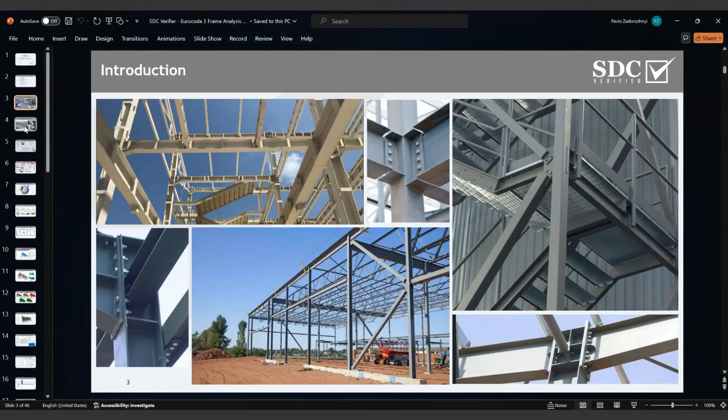To avoid such failures as global buckling, as you can see from this example, and to avoid some problems with the joints, because when you have some problems with the joint, in the end it can collapse the full structure. So in some cases, it can be a very real challenge when you have hundreds or even thousands of members and joints on your structure, and all of this should be checked. Also, you have like hundreds of combinations which you need to take into account and analyze the influence of each on your model. So all this can take a lot of time.

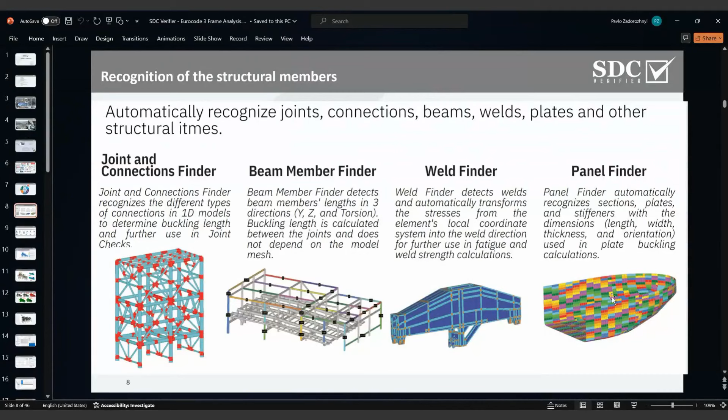As I mentioned before, we had the standalone version. Basically, that's how this standalone version of SDC looks. In that case, you can prepare your FEA model, analyze it using Simcenter Nastran solver, and then use all the possibilities of SDC to check this model without any additional program. So you will have only one file which already includes the model and SDC project, and you can work with it and prepare all your documentation. So that's basically how the Windows SDC looks.

Here you can see some FEA model. From the left side you can see the model tree explanation - all FEM loads applied to the model, all constraints, explanation of your job, individual load sets, and all required information about your model.

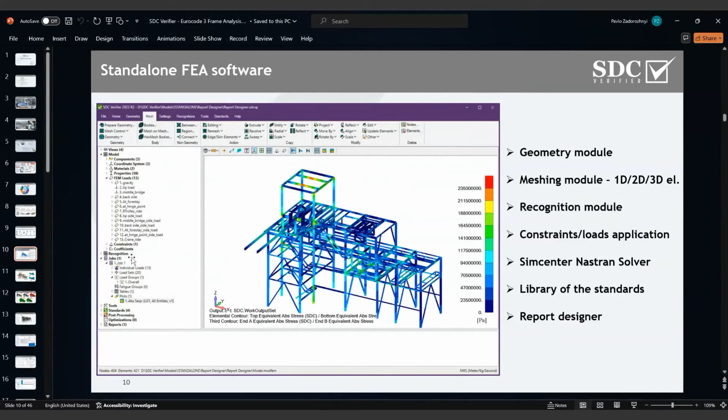Now let's go to model explanation. For this example, I will use a simple model of a steel frame. This is part of some industrial building. The model in general is created with 1D elements, as you can see - simple rolled shapes, in general I-shapes or C-shapes.

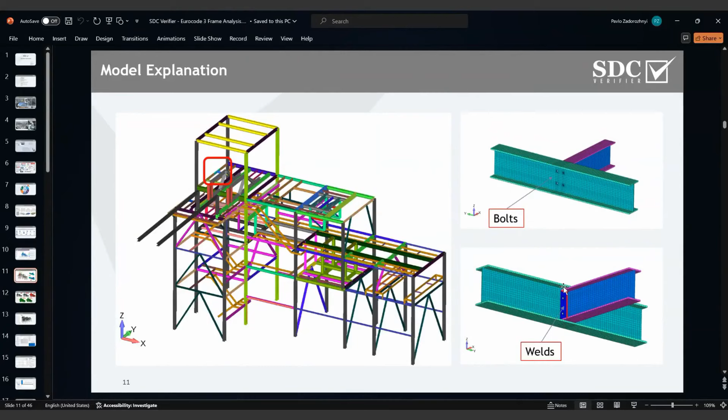Also, at this part, I created some detailed model with plate elements, 2D shell elements, which are connected with 1D element bolts. I will use this detailed model for bolt check - we will check it according to Eurocode rules. Also, to make this connection, you have a rolled I-beam which should be connected with bolts, so you need to weld some plate on top of this I-beam. I will use this to show you how to do a weld strength check according to Eurocode rules.

The model already has all loads applied. Here you can see a few of them. We take into account the dead weight of the structure, and we also apply some loads from the dead weight of equipment - this is some local influence. Also, we take into account platform dead loads, which is like distributed forces. And we would also like to take into account wind load in two directions - wind load in the X direction and in the Y direction.

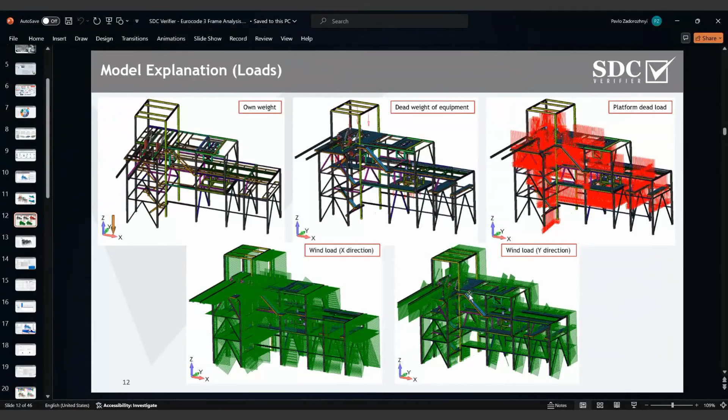Also we use a simple type of constraint - I just simply fixed it from the bottom. It basically simulates the connection with anchor bolts, nothing special, just a simple fixed constraint. So at this step, basically, we are done with the model - we had the model, we applied forces to this model, and we had some boundary conditions.

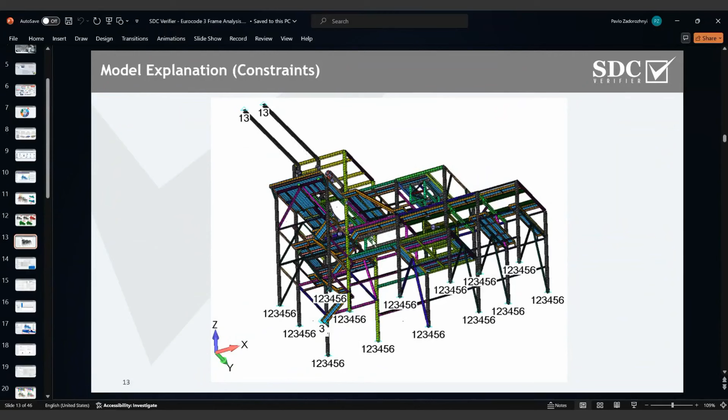Next, what we need to do, and it is very important, is to prepare some load combinations according to standards. SDC Verifier basically gives you two options for how we can create this load combination. The first one is shown here - it's based on some hand calculation, so you can prepare a table with load combinations directly within SDC.

You just select under the model tree, load sets, select create, edit multiple, and you will see a table with the list of your individual loads. We see that I had 11 individual loads in my model, and I combined them in total into 16 load sets. Here you can read in a row the title of our load combination, and all the individual loads which I include into my load combination, with the factors which will be multiplied to this individual load.

Basically, a load combination is a linear combination of our individual loads. An individual load is a combination of FEM load plus boundary condition. So this linear combination will show us the total influence of all these loads on our structure with the proper load combination. You can easily work with this table - you can create this matrix with factors directly here in SDC, or you can prepare your matrix with factors in Excel, where you can link all your cells with some equation.

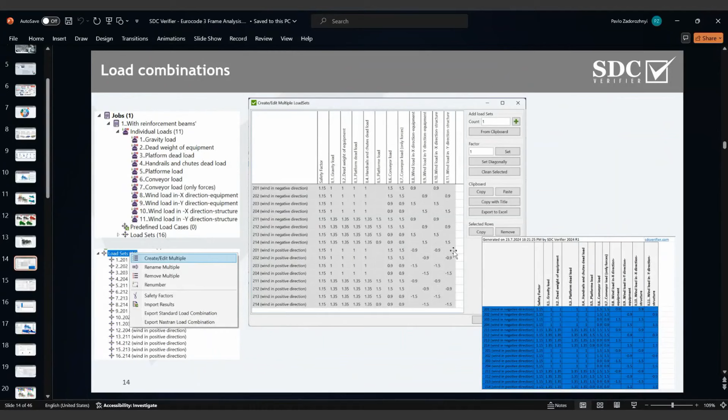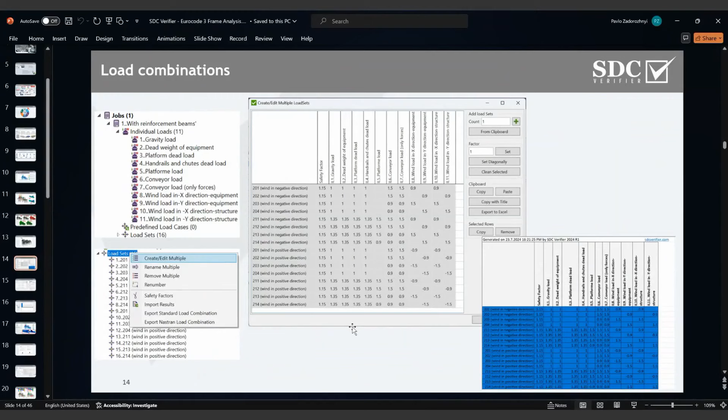If you need to change some dynamic factor or partial safety factor, you can automatically update it in Excel, then select all these factors, copy and paste to this table, press OK, and it will automatically create new load sets. If you already created them, it will update the existing ones with the proper load factors. So this is the first way to work with load combinations.

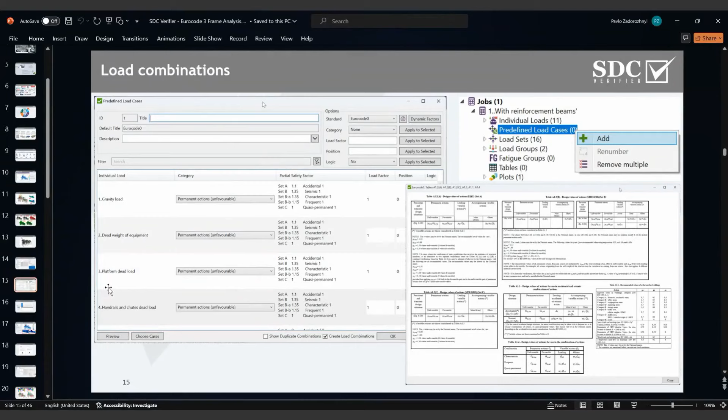You can already see the partial safety factor, and if needed, you can also add dynamic factors to each of these individual loads and press OK. After that, all load combinations will be automatically created according to these tables, with the proper partial safety factor and taking into account any additional dynamic factors you typed here. So these are the two ways to create load combinations in SDC.

After that, the next step we recommend is to combine all the load sets into a load group. A load group will show you the worst results, the highest results, from all the loads or load combinations included in this group. This helps you see, in one plot, all the worst results and find all critical zones on your model. We use load groups to show all our check results, because this helps us not to miss any critical zones.

So a load group is like an envelope combination, showing you all the worst results from all items included in it. In our case, we will use load group envelope load sets. This is automatically created, and as you can see, it already includes all our load combinations created in the previous step.

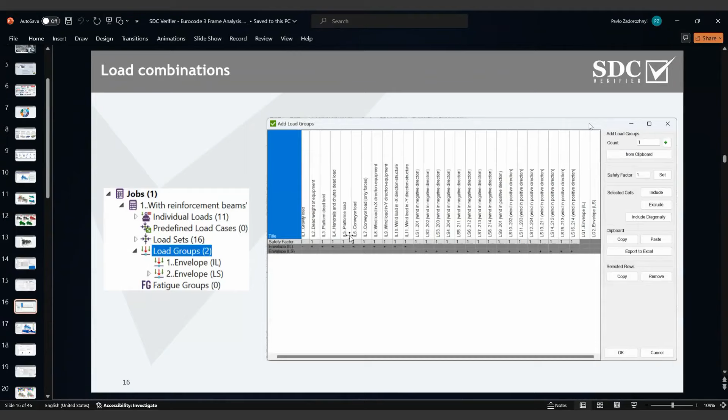So we're done with all this preparation, and let's check some stress results. The model was already analyzed, I prepared the load combination, and I try to check my stress results on the load group. As you can see, the stress level is not so high.

Assuming we use steel as S235, all stresses are below the yield limit, but this plot and results of stresses do not give us an answer if our structure is safe, because buckling can occur in some members even when stress is less than the yield limit. To get an answer on whether our structure is safe enough, we should do some checks according to standard rules.

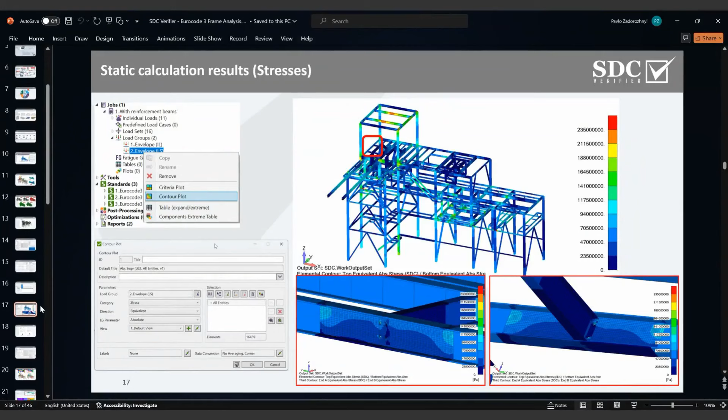For this, we will refer to two standards during this webinar: two Eurocode standards. The first is Eurocode 3 Part 1.1, which helps us check our structure in general. It helps us check all cross sections, and most importantly, check all our members for buckling. The second one is Eurocode 3 Part 1.8, which covers the design of joints.

This will help us check our joints in more detail. We will check the bolted connection which I modeled in detail, and also check the welds at this connection. So we will perform a weld strength check. And we will start from the global check.

This is Eurocode 3 Part 1.1, the beam member check. To do this, first of all, we need to recognize all members in our model. To do this quickly, we can go to recognition tools and select from the list the beam member finder. After that, you will see the main window of the beam member finder, with some settings, but in most cases you don't need to change anything since you can use the default settings.

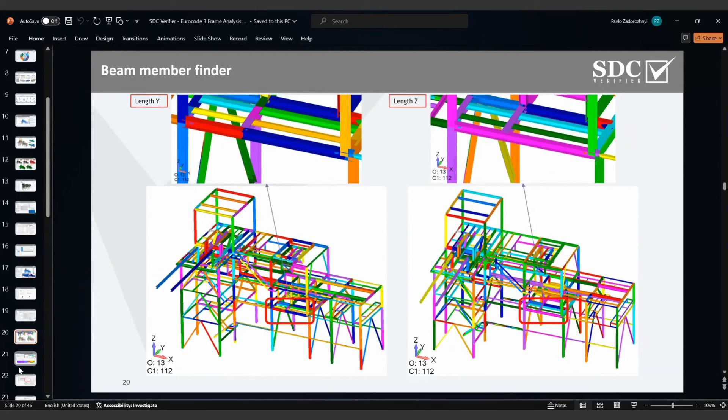Also, each of these members can be added manually. So you see we have a tab with edit member, and you can hide or select from a full list some member which you are interested in, or you can, by pressing this button, select one element on a member, and it will automatically show you this member.

And from this picture, you can see the full length of this member and on which nodes it is divided. For each submember, you can see the length which was recognized by SDC. This is shown for different planes, so LY, LZ, and also for torsion. All these lengths you can edit manually.

For example, if you want to remove some node, to check what will happen if the buckling length is taken into account from this node to this node, you simply unselect this node. So this is node 1345. You go to this node and select it in that direction, and in that case the full length from this node to this node will be taken into account in the check.

So yeah, all this is editable, and you can easily edit all these parameters of each member which was already recognized in your model.

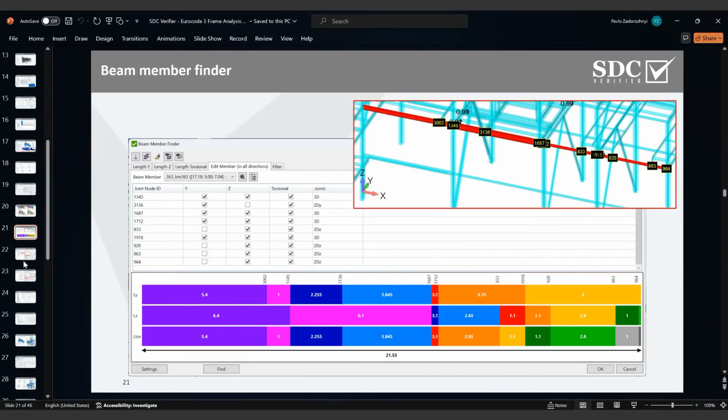We have finally recognized all our members, and the next step is to add standards to our project and to define some parameters of the standard. So to do this, you go to standards in the model tree.

Select, press the right mouse button, click on it, and select from the list the required standard. In our case, we start from the member check, so we should select Eurocode 3 members.

After that, you will see a window with standard settings. We call this the standard wizard window. Here you can see some parameters which you should define, and some parameters which are already defined as default. For example, all these factors, this is a default value.

It refers to the standard, so you can easily find it in the standard. Also, for each of these windows, when you open it or press F1, you will be directly redirected to our help page of SDC, where you can find explanations for all these parameters, with reference to the standard, why you need to define it and where we are taking this value from.

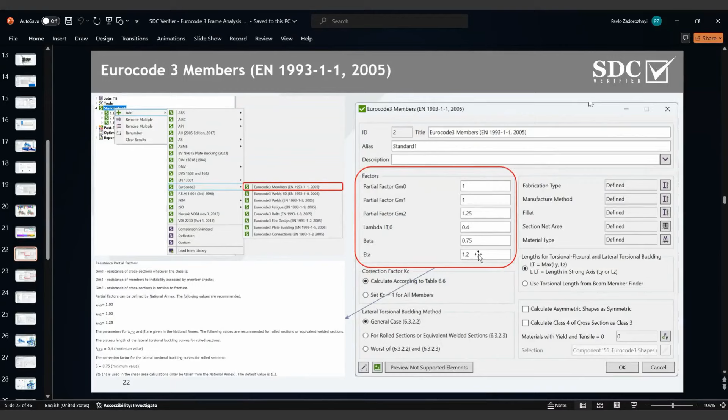So this parameter is default, but as you can see, you can still edit it. You can type here your own values, or you can leave it by default.

The next one, you should define some parameters of your member. So this is like some fabrication type, and it will have influence on the results. Fabrication type means you should select whether it's a rolled beam member or welded, so some manufacturing method, or hot finished, or cold formed.

In some cases, when you simplify your model and prepare your cross section without taking into account fillets on your model, you can edit it here, by typing in a value for your fillets, and it will be taken into account when the cross section is being checked.

Also, same for section net area, because when you model everything with 1D elements, in some cases it's hard to take into account some holes for the bolts. This will reduce cross section area, and you can take this into account here by defining the proper value. The last parameter is material type, which is required because buckling curves used in the calculation depend on it.

Also, this is a correction factor, which depends on moment distribution. It refers to table 6.6. You have two options: you can calculate it according to this table, or go the easiest way and just set it to one for all members, which would be like a worst case scenario.

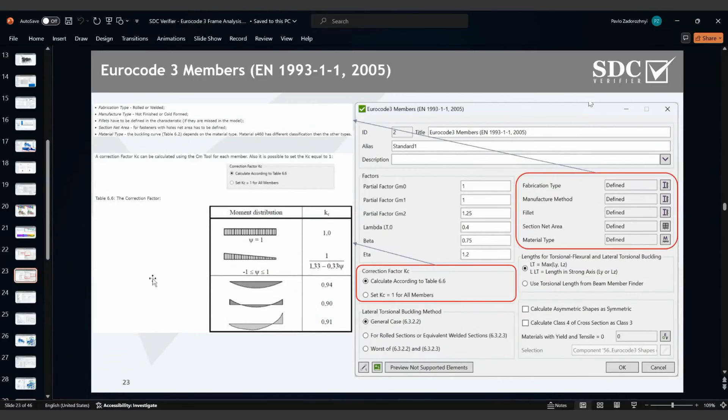After we define all these parameters, you can press OK. Also, one more thing: if you forget to recognize members using Beam Member Finder, you can go to Beam Member Finder directly from this window of the standard wizard by pressing this button. It will open the window with Beam Member Finder, and you can recognize all members, then go back to this window and set up all parameters. When you press OK, under your standards you will see that you have added one standard, the Eurocode 3 member.

When you open the standard, you will see a list of checks. This is a list of checks which you can basically find in the standard, and each of these checks you can easily edit.

For example, if you select this check, press right mouse click on it, select edit, you will see this window with the check where you can find all formulas or equations used in this check, with reference to the equations in the standard. So everything is clear, we do not hide anything. We also give you an option to edit these checks, so you can convert the standard into a custom one and easily edit it, add your own formulas or update some formulas already included in the standard, and then use it for your calculation.

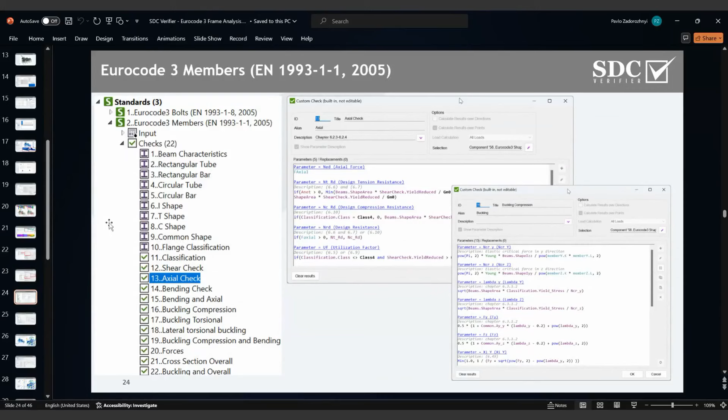When we add the standards, the next step is to run our check. To do this, you need to simply select it. I always start by plotting my results, and for this I select the last check in this Eurocode member check, because we have a lot of checks included in this standard: shear check, axial check, bending check, buckling compression, buckling torsion, and so on. This last check is buckling overall, and it will show us the highest values of utilization factor from all the checks above.

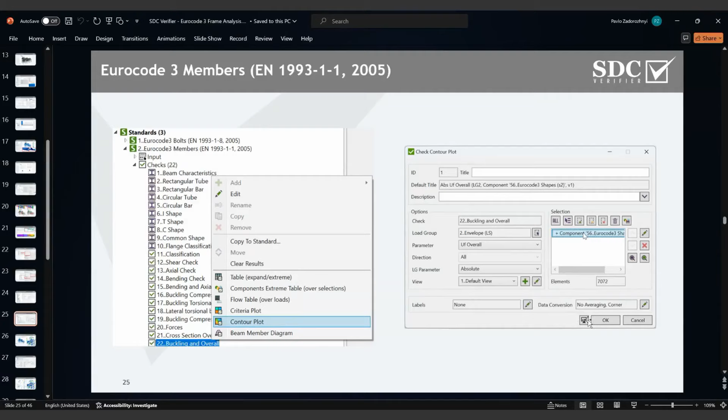So I would like to look at the contour plot. After selecting contour plot, you will see a window where you can set parameters for your plot. I use the parameter utilization factor overall, and I'd like to look at results for a load group with all load sets included. After pressing the preview button, SDC will start to analyze the check, and after that you will see how the results of the beam member check look. As you remember, the stress level was really less than yield.

But when you look at this beam member check, you can see that we had some overstressed members. Not overstressed, but some members with utilization factor higher than one. All our checks present results with the value of utilization factor. So all values higher than one mean that it doesn't pass the check according to standard rules.

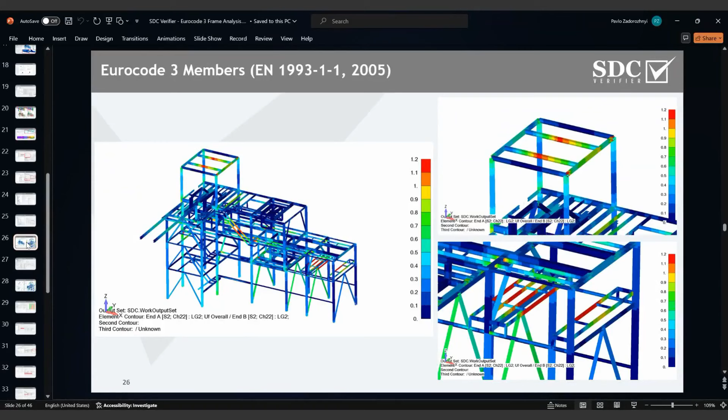And when I see this, my next step is, I would like to post-process these results. I would like to know what the real value is here, how much bigger than one, and also what load has the biggest influence on this result. To do this, we can use our SDC post-processing tool. This is Peak Finder.

It will help us not miss any overstressed parts of your model, and also help us find out what load combination mainly causes this problem, and check all critical zones. So I add this peak finder and set some parameters. I will check based on overall utilization factor. I would like to see all zones with values of utilization factor higher than one.

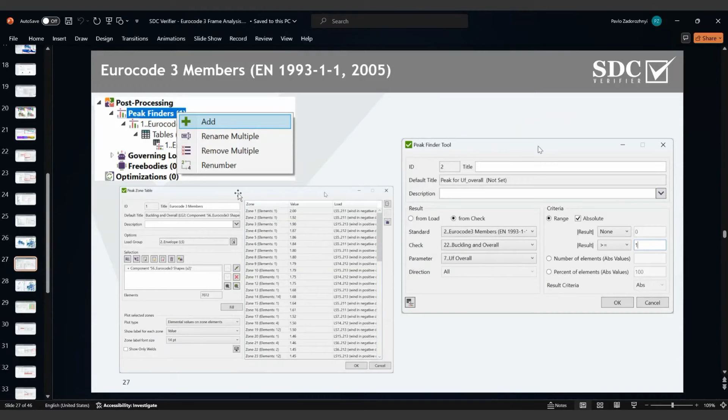And after I press OK, I will see this table. This table basically shows me all zones in our model with utilization factor higher than one, and the load which has the biggest influence on these zones. And also, I can make a plot for this. I can visualize this. If you go to the next slide, you will see.

That's how these results look in a general plot of member check, and then I plot it from peak finder, and you see that at this middle part we had utilization factor 1.16. So this part is also overstressed, and here it is 1.68. With this peak finder tool, you can easily find all overstressed zones in your model, even if you have a really big model with hidden parts which you cannot see in the full view. The peak finder will highlight all problem zones.

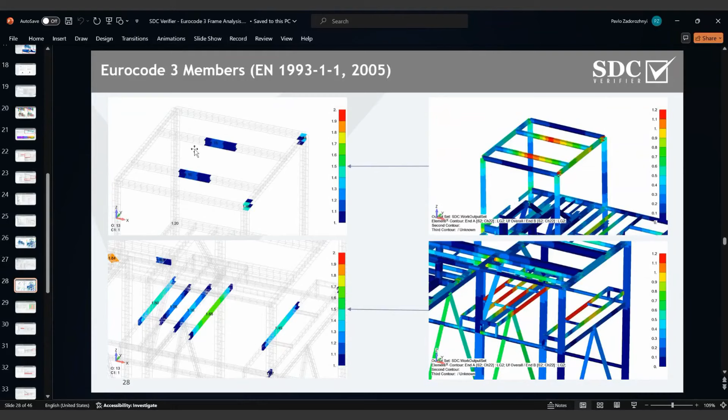Another way to check results is the table. You can check all your results in the table. For this, you need to select the same check, but instead of selecting contour plot or criteria plot, you should select table. After that, you will see this window. You just need to press fill table, and it will fill this table with all results for each member. Here you can see the ID of the beam member, and here the values of all utilization factors. The overall utilization factor is the maximum of all of these, 1.52.

And also you can check in detail how this is calculated. When you, for example, select the first member from this list, this button will activate. This is detailed results. When you press it, you will see this window, which shows a step-by-step calculation with all values and how they were calculated. So it really helps you understand why you have these results, because of what numbers and characteristics. It helps to figure out your problem.

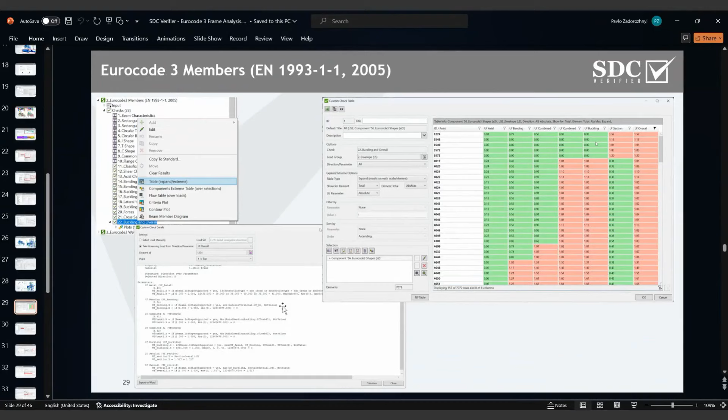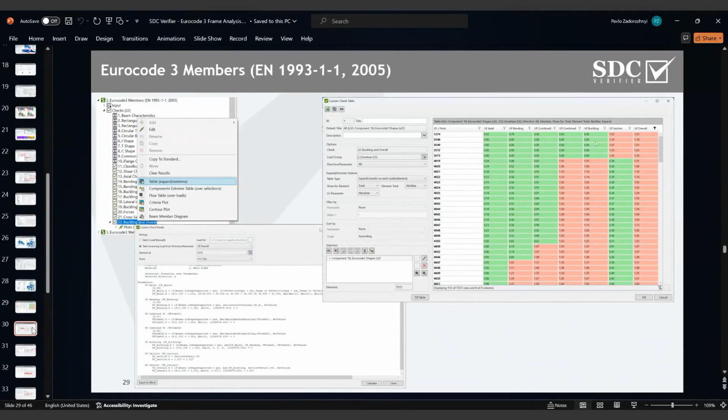So we are done with Eurocode member check, and the next one is Eurocode bolt check. We don't need to recognize any bolts here. We just need to select the proper elements which we need to check as bolts. So we can immediately start with adding our standard. We select the proper standard from a list, in our case Eurocode 3 bolt. After that, we will see the window with some standard settings which you need to define.

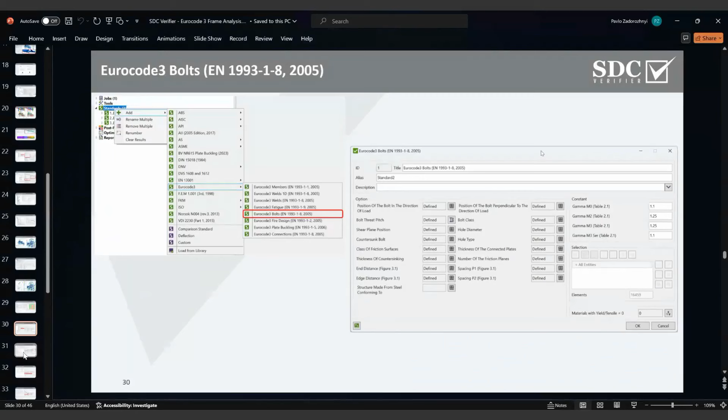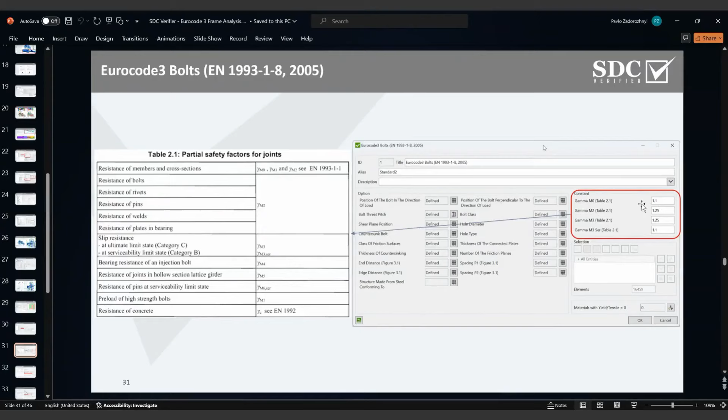You see there are more parameters than there were for beam member check, because we cannot automatically recognize all these parameters for a bolted connection, so you need to define them manually. First of all, this is a constant. This value is according to table 2.1. It is a default value; you don't need to change it because it directly refers to the standard. Next, you need to define end distances, edge distances and spacings for your bolted connection. It will influence your results, and it refers to these figures from the standard.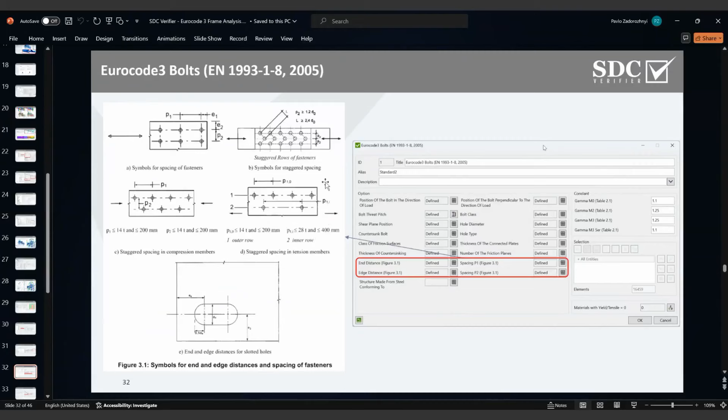Also, you need to define some hole type, to determine values of factor Ks, and also class of friction. All other parameters are parameters which refer to some bolt dimension. But for example, for the position of the bolt in the direction of load, you should define which bolts are end bolts or inner bolts. The same for position of the bolts perpendicular. So we need to define which bolts are end bolts and which bolts are inner bolts.

So, bolt class. This is a parameter of the bolt which will be used in a preload calculation. Some hole diameter. Also, you need to define the bolt thread pitch, which we cannot measure from the simple 1D element, countersink bolt, if it is countersunk or not, thickness of countersink, and so on. So these are simple parameters and dimensions of bolts.

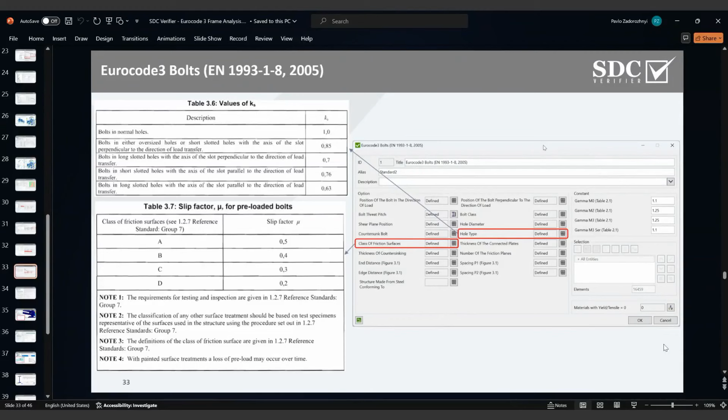When you define all these parameters, you can press OK, and you will see that one more standard is added to your standard list. So it is Eurocode 3 Bolts. And when you go to checks, here you can see a slightly smaller number of checks. All these checks are grouped according to this table 3.2. These are categories of different bolted connections, depending on loading and the checks which you need to do. So this is bearing type, slip resistance, non-preloaded, preloaded bolts, and so on.

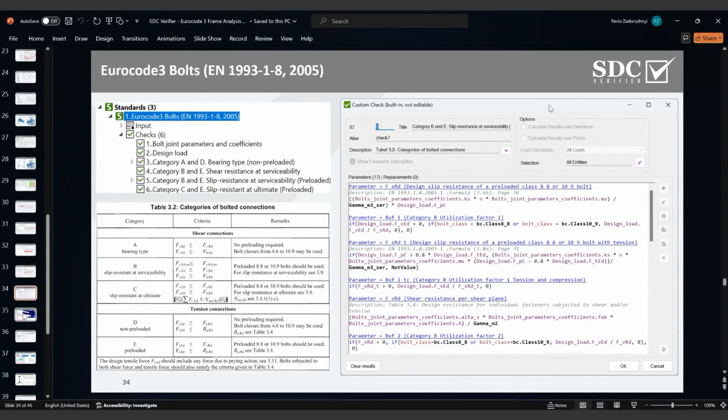And also each of these checks you can edit. Select one of them, press edit, and you will see the window with all formulas, with all equations, with reference to the standard. You can easily find it in the standard, so you can convert this to a custom check and update manually. So edit our formulas, edit your own formulas, and use them in your calculation. And when we are done with this, we can plot our results.

So first of all, I start with plots. I would like to check my bolts on slip resistance at serviceability for preloaded bolts. So I select this check. I select criteria plot. I select my load group. Select these 4 bolts and just press preview. And after that, SDC starts to analyze this standard, and that's how the results look.

Yeah, the results look not so high. You see that all stresses are less than... not stresses, all utilization factors are less than 0.2. But as you remember, even the stress level at these zones was really low. So these results are reasonable. So we do not have any problem with this bolt and with this bolted connection in general.

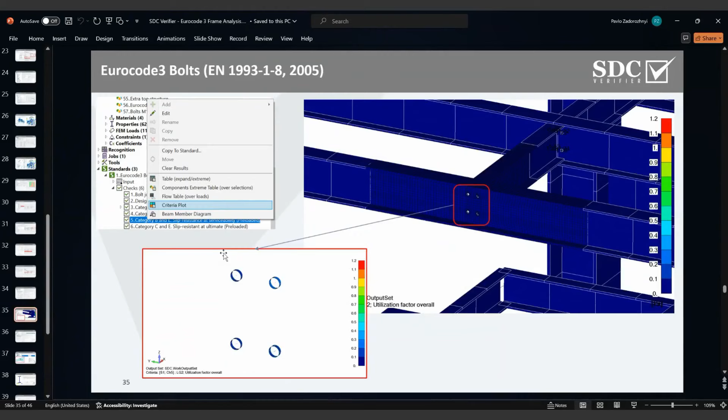So next step, we also can check this with the table results. In the same way as we do for plots, we just select the same check, select table from the list, select all these bolts, press fill in, and here you can see all utilization factors calculated in this check. And you see that really all factors are less than 0.2. Yeah, one of them is 0.23.

And also, you can check all details of how it was calculated in the SDC. So you select one of these items from the table, press this button, detailed results, and here you can see all equations with all values, how it calculates step by step with end results for this current bolt. At this step, we end up with the bolt check.

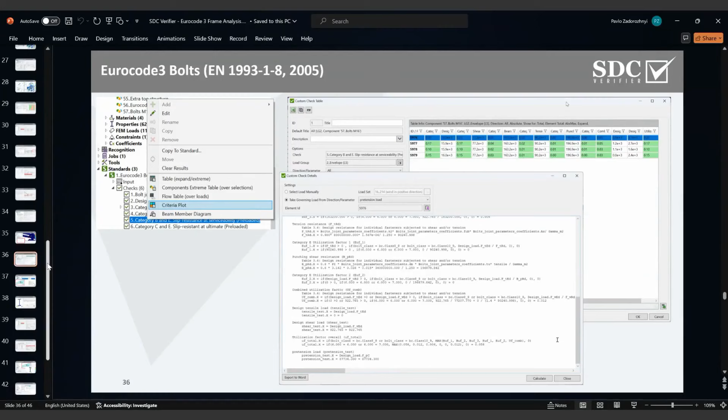And the last check which I would like to show you today is the weld strength check. For this check, we need to refer to our recognition tool because we need to recognize elements which basically will be calculated as a weld in this check. To do this, we need to go to recognition tools, select weld finder from the list of recognition tools, and after that you will see the main window of weld finder.

Also, as in the case with Beam Member Finder, you will see here some settings. In most cases, you can leave them by default, just press the button find, and it automatically starts to recognize all welds in your model. The recognition time depends on the size of your model, but even on a big model, based on our experience, a model with more than 1 million elements, it takes less than 5 minutes. So yeah, it really works fast.

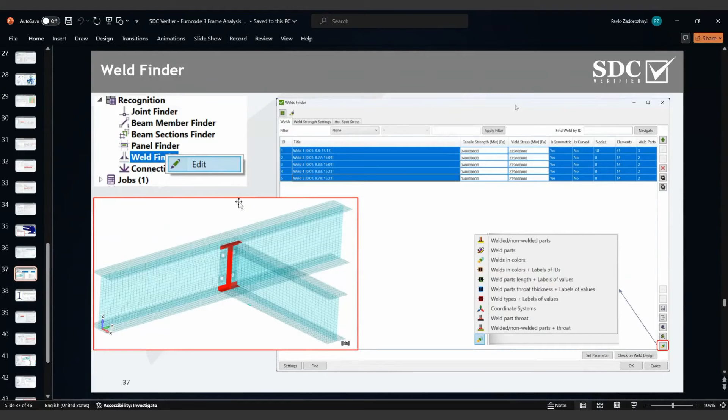When you press find, when SDC finishes with recognition, you will see here a list of welds. In my case, I have only 5 welds because this is a simple model and it is explainable. I have 1 weld, second weld, third weld, fourth weld, and 5 welds. And I would like to plot this weld because SDC also has an option to recognize what part is welded and not welded. So let's plot this.

Because the program does not know what weld type should be used here. For this, you need to go to the weld strength settings tab. Here you will see a list of your 5 welds, and you can apply a weld type to each weld. In my case, I just apply a simple double fillet weld by selecting this option.

To apply the throat thickness of this weld, I use a simple rule. I set that the throat thickness should be equal to T divided by 2. In this case, SDC will take the thickness of this welded part, divide it by 2, and it will be used as the throat thickness of this weld. After you apply this, you will see this table.

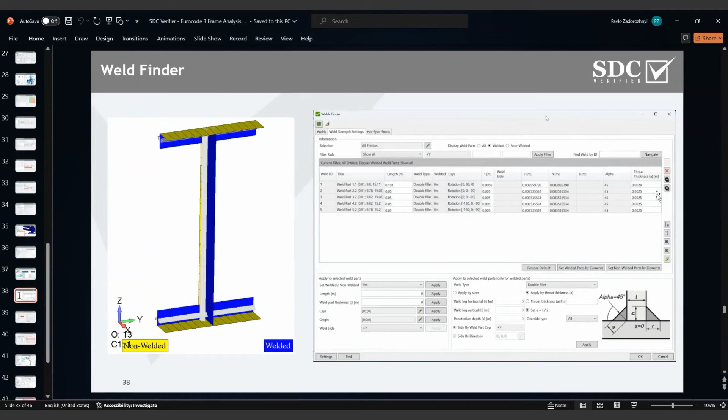So we apply to this weld the double fillet weld type, and we apply our throat thickness, which is equal to T divided by 2, because you see the thickness is 5.6 millimeters and the throat thickness is 2.8. So this is 5.6 divided by 2. After that, we can press OK. We are done with defining the weld type parameter.

The next step is to add the standard. As for the previous standard, just select standards. From the list of standards, select the required standard. So it is Eurocode 3 welds. After that, you will see this window with standard settings.

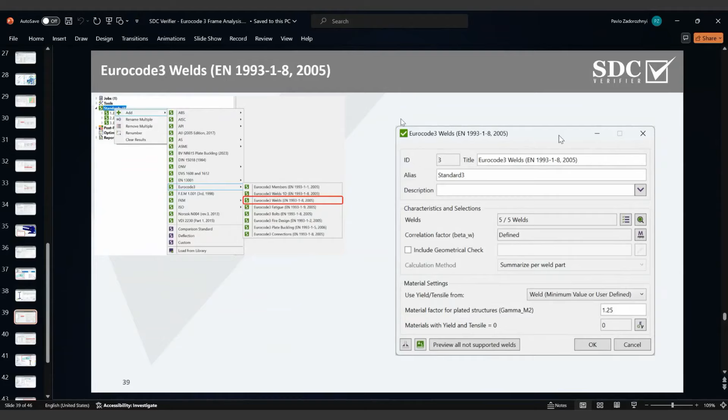In the case of the weld strength check, it is a simple standard. You do not have a lot of parameters here. What you need to define here, basically, is the correlation factor. It refers to table 4.1 and depends on your material type. Also, you can select the calculation method. You can use summarize per weld part, in which case you will see one utilization factor per full length of weld, or you can show results for each element on this weld.

A few more parameters: what yield and tensile should be used. They can be taken from the weld finder tool or from the material, or as the minimum of both. The material factor gamma is the default value. Also, from this window, if you did not recognize all welds before, you can go directly to the weld recognition tool.

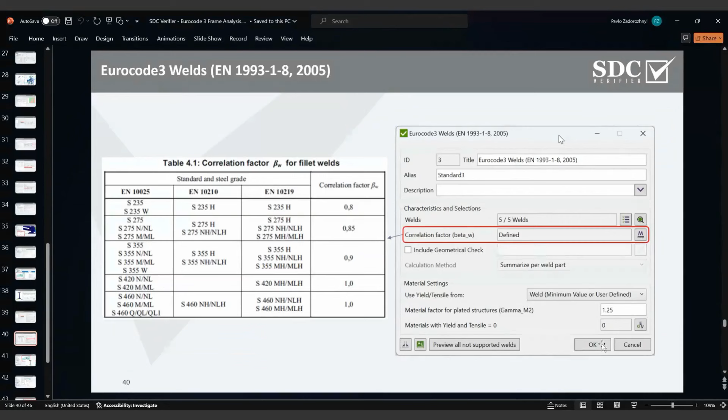When you are done with that, you press OK, and you will see under standards that the new standard is added. As for previous standards, I would like to start with plotting some results. To do this, I select from the list of checks the last one, weld check, add a criteria plot, and plot these results. Results in the case of the weld strength check will be shown only for elements which were recognized as a weld. For all others, it will not be calculated because it is not a weld part.

As in the case with bolts, for welds we also do not have any problem. The stress level there is really low. It means that the forces in this weld are also not so high, and that's why stresses are less than 0.1. So the utilization factor for these areas is less than 0.1.

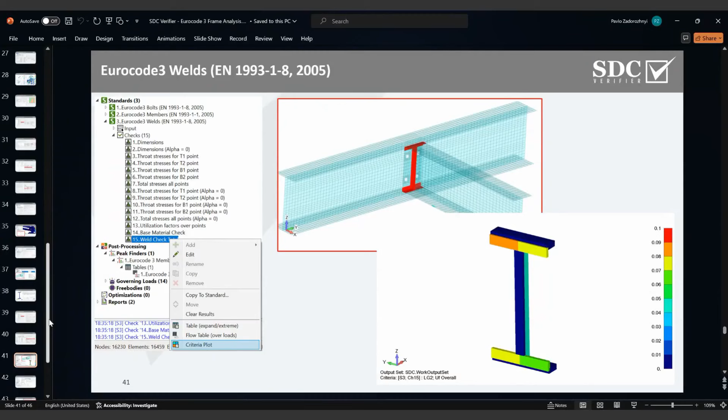Next, we can also check this in the table. In the same way, we select the last check, select table instead of plot, select all welds and just press fill table, and here you can see a list of welds with a utilization factor for all of these welds. As for all previous calculations, you can also check detailed calculation for this weld. You select the weld, select detailed results, and you will see this window with step-by-step calculation for all welds.

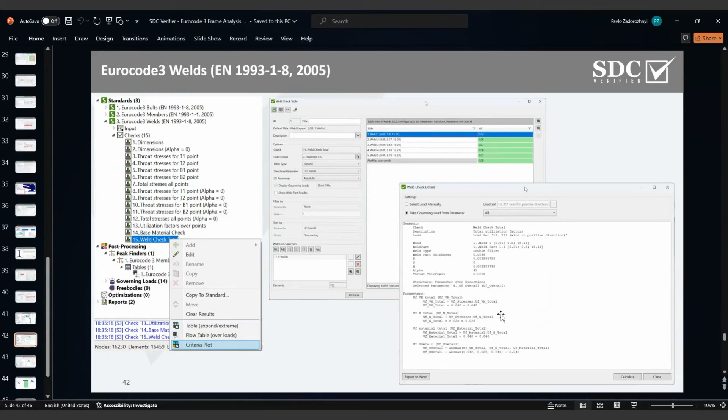When we are done with all our calculations, what we would like to do next is prepare some documentation, some reports, and for this you can use reporting in SDC Verifier. Just right mouse click on report, and you see that we have 4 different types of reports. The first one is empty. In this case, you will have an empty structure of your document, and you can add any paragraphs and chapters to this document on your own.

The second one is predefined: designer model setup. In this case, a document will be automatically created with chapters and paragraphs which describe your model setup. It will be a description of all materials used in the model, all cross-section properties, all FEM loads applied, all constraints, and so on.

The third one is results. It is also a predefined report. In this case, for every individual load combination and load group, a plot with stress, a plot with displacement, and a table with maximum stress and maximum displacement will be automatically added, and you will have a huge document with all these results. And designer full is the combination of model setup plus results.

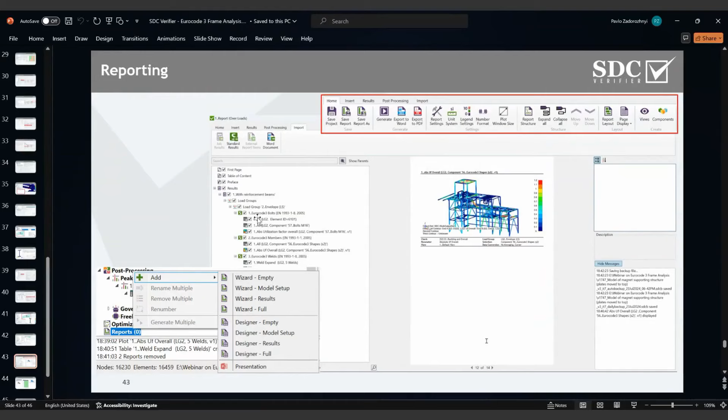Also here you can see that I created some document. Since I created some plots and tables in the main window of SDC, I can import these plots into my report. What I basically do, you see that I import my results for Eurocode, bolts check, members, and weld. So I had a few tables, one plot, and I can generate this report and then export it to Word, and that's basically how it will look. You will have a first page and some tables with results.

What else is useful: all these reports are stored in the SDC project, and if you need to change something in your model, update some forces or some cross section and rerun this analysis, you don't need to create this document one more time. You don't need to create the full structure of this document again. You can just reanalyze your model, rerun all checks, then open this report which you already saved in SDC, generate it one more time, and export to Word, and you will have exactly the same report, but with updated results based on new inputs.

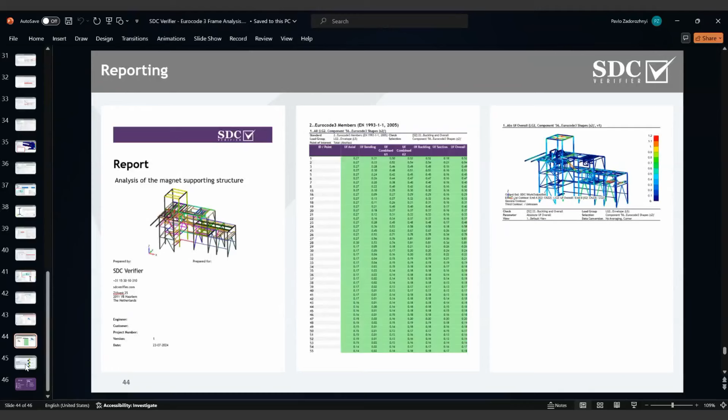So that's it about SDC. As a conclusion, you can use SDC to speed up all your processes with FE analysis. You can use the standalone version of SDC, or you can use it as an add-on together with ANSYS, with Femap, or with SimCenter 3D.